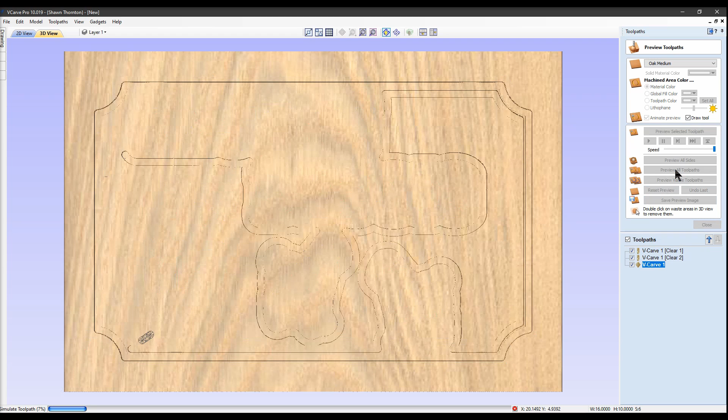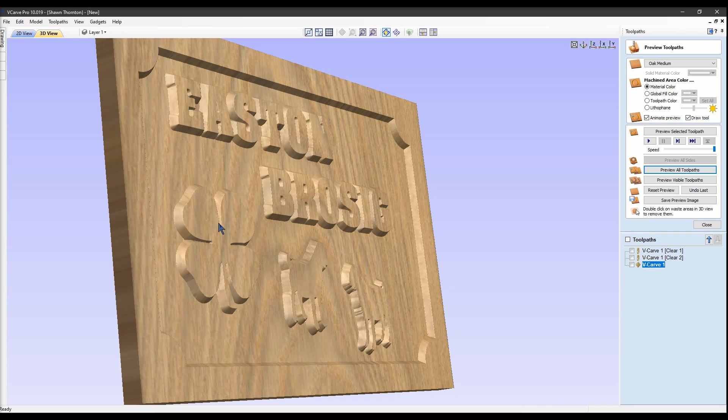I've got mine on high quality on the preview, so it does take a few minutes, but you do get a better view of what you're actually going to see. I do apologize for the little delay here. Okay, so good. If you look at it now, you'll see that our goats and our clover are not cut out, which is what we want. So now we can go back and do a separate VCarve strictly for the design we want on the inside of here. So we can go back into our 2D,

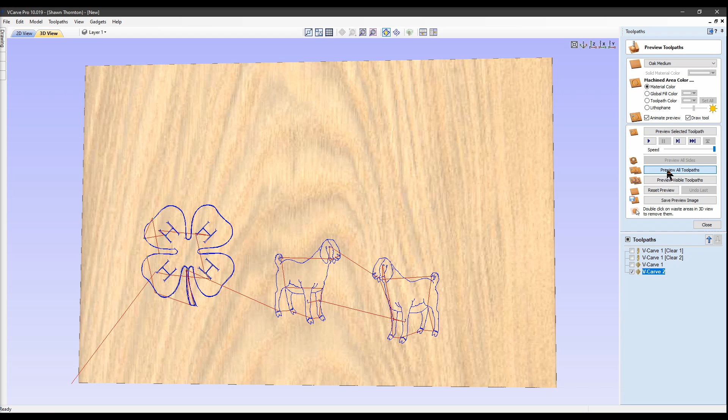and now we want to highlight the inside vectors. Careful not to highlight the outside. And we're going to go into VCarve. And again, we don't need any clearance tools on this one. But we are going to use a 60-degree V-bit with a 1/4 inch depth of cut. And we calculate that. So now if we reset our preview all toolpaths, you'll get the first cut, and then also the detail on the second cut.

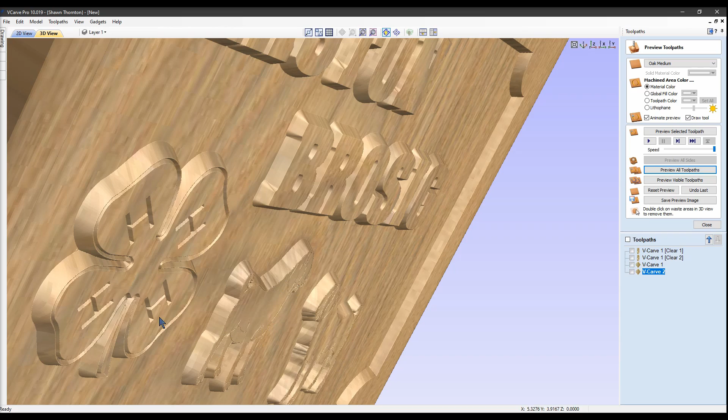Perfect. So now this will be a pocketed cut here. It's cut back. Your name will stick out, and so will your clover and your goats, but you still have the detailing on the V groove, on the V-carve. So that is what we're going to cut out.

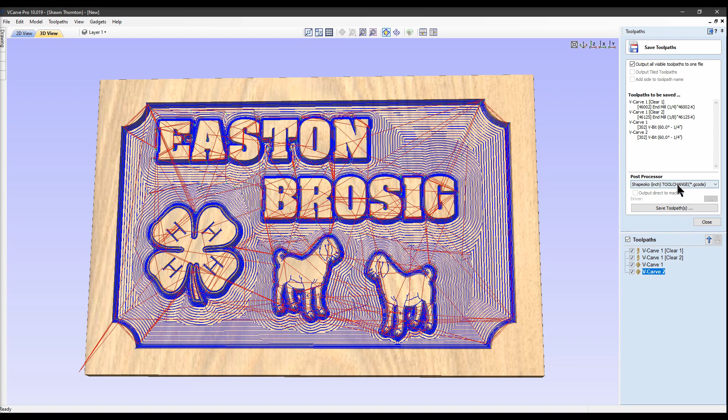So we will close this, highlight all of our toolpaths. We select Save Toolpath, and we select Output All Visible Toolpaths to one file. Here are all your different bits. We're going to use the Tool Change post processor. So we'll save that, and we'll take it over to the machine and let's cut it out.